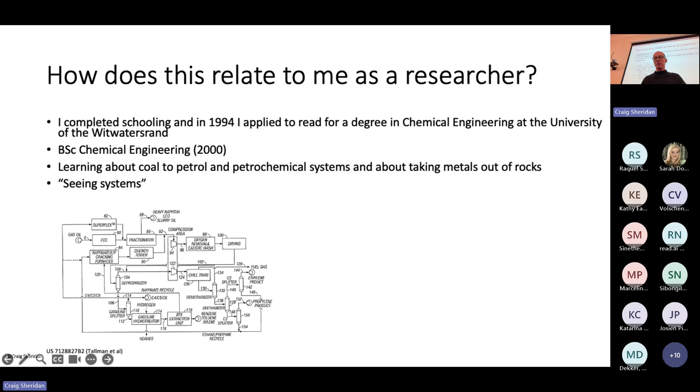The chemical engineer in me, the one that saw systems, observed this and shelved this information for later use. Specifically, I started to observe the link between environmental degradation and poverty. And I was starting to see some of the parts of much bigger systems at play. I was then very lucky.

I was given an opportunity to become a lecturer at Wits University in 2010, and I used this opportunity to conduct research. Around this time, there was a presentation given at Wits on publishing, and in fact, it was someone from Science or Nature who came to our university, and really, the gist of their presentation was that if you want your research to have impact, you need to be researching something that impacts society.

I've always had a very strong interest in water, and continuing to research water made sense since my PhD was on remediating effluent. I previously observed that wetlands are able to purify effluents, and I was intrigued by this. They always looked beautiful and had the secret hidden benefit of purifying wastewater.

So I set out, and these are big parentheses, naively as it turns out, to try to understand how this happens. And it turns out I'm still trying to understand some of these mechanisms. But water was an obvious domain for me to conduct this research. At the time, as a chemical engineer, there were also two other very obvious themes for me to consider. The one was acid mine drainage, which I spoke about last week, and the other one was constructed wetlands to treat different elements. So I'm going to separate these out for now.

I conducted initial research on constructed wetlands for treating winery effluent. The study had two thrusts. One was trying to understand how the fluid flowed in the constructed wetlands, and the second was trying to model the rate of degradation of the components of the effluent. Turns out that they work quite well for certain types of effluents.

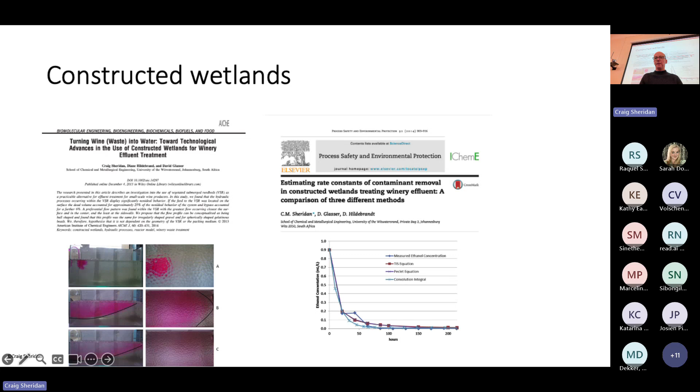This led to a research program to determine which effluents we could treat, and the mechanisms of this treatment. We treated mine effluents, and we successfully removed chromium. We also observed that wetlands became blocked, so we started to try to understand why they were blocking and how to overcome this. Obviously, if your treatment system is blocked, it doesn't work.

During this period, I was also fortunate enough to do the conceptual design of the greywater treatment constructed wetland at the Vodacom Innovation Centre north of Johannesburg. Following on from this design, I collaborated with Andrew Thatcher, who's a professor in the Department of Psychology, to assess how people engaged with the constructed wetland. The findings were very interesting, certainly to me.

The technical manager had a very different understanding of how the system worked to the cleaner, and both of them had a different understanding to mine as the designer. Most importantly, of everyone who used the system, the cleaner, who was a very nice lady, had the greatest potential to destroy it. She used bleach to clean the basins, and if you throw bleach into these living systems, they tend to die.

So my realization at this point was that as designers and engineers, it's our responsibility, and I use that word very carefully, it's our responsibility to engage with people. We must do more than just design, build, and sit back.

We conducted further research into the hydraulics of these systems, and I'm particularly showing this page, which is from a paper with lots of really horrible equations, to show that we went very deeply from a mathematical modeling perspective to understand how the fluid flows within these constructed wetlands.

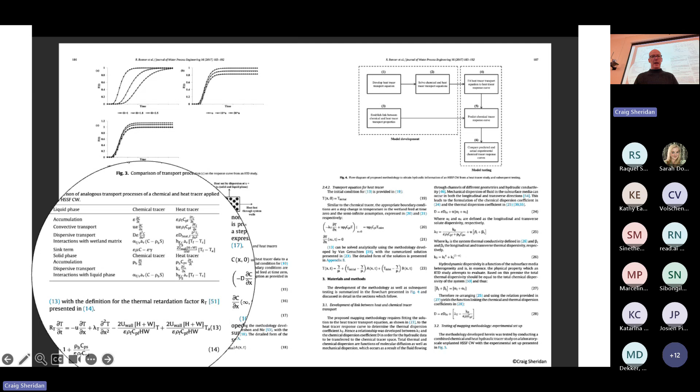And again, collaboration was key. We had mathematicians and environmental engineers for collaborators and input, but we also relied on fundamental chemical engineering theory. And based on this, we decided to expand this research into the physical world. So our statement at this point was, perhaps these could work in an unplanned urban context.

And I want to take a moment here to define what is meant by unplanned urban. In South Africa, we call these types of settlements informal settlements. I contest this definition on the basis that these settlements are not informal. Where we were doing this research, some of the homes have been in existence for more than 20 years. Many are now brick and plaster structures. This is formal. What these settlements are is unplanned, which is why we're calling them unplanned.

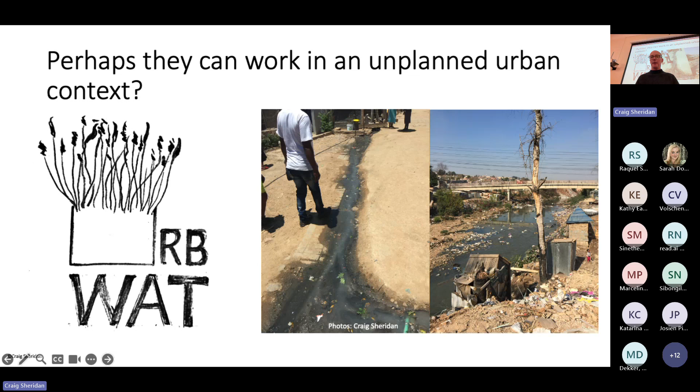I believe this affords the residents who live in these settlements a dignity which is denied if we call them informal. In exactly the same way, I try not to use the word community, as in community engagement, because this differentiates us from them on the basis of the community where you hail from. And I find this obstructs meaningful engagement, certainly at least in my head when I'm trying to work with the local people. Therefore, I try to call the community the local people, but this is a much harder habit to break than calling them informal settlements.

So we were very lucky. We applied for EU funding from the Water JPI, which is now called the Water for All. And we were granted funding from these three different organizations, which is the BMBF, FORMAS, and Water Research Commission. And we designed this project called URBWAT, which was accessible greywater solutions for urban informal, you see, we haven't changed our nomenclature yet, urban informal townships in South Africa.

So when you have a look at what these places are, what we find is this intersection of multiple interconnected water issues. I'm going to put my laser pointer on. We have sewage, which comes out of blocked sewers. There's a reason many of these sewers are blocked. It's a socioeconomic reason. And this often comes from a formal or a planned suburb adjacent to your site.

We have above ground, we call them portaloos. They're often used in building construction sites. These belong to the local inhabitants, and that would typically serve 4 people, 4 families, 4 homes. But you also have this issue with stormwater because there is no planning. So stormwater backs up and it builds around your site.

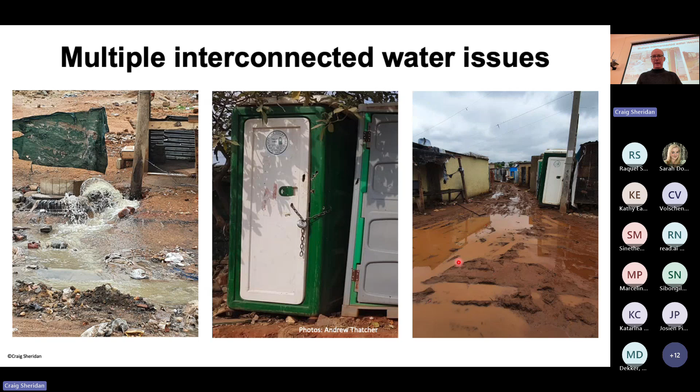In addition, we worked at this location, which is called Silvertown. This is in a suburb called Alexandra, which is just north of Johannesburg and just east of Sandton. Sandton is the economic hub of Africa, for those of you who don't know. This suburb here is called Silvertown, and the reason it's called Silvertown is it was initially built with silver corrugated iron shacks. And this is the Jukskei River, which is the primary drainage river for Johannesburg. It flows north into the Indian Ocean.

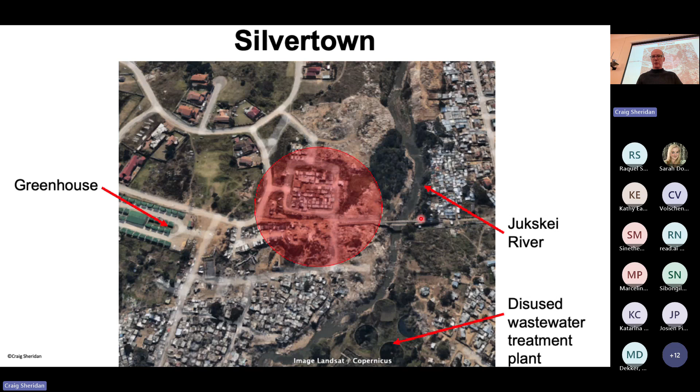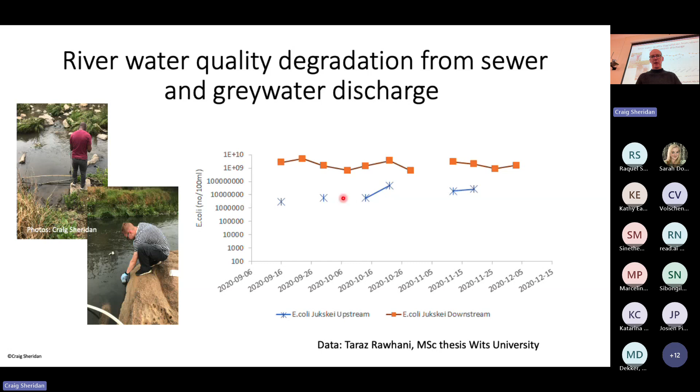So, and this is a river. So we have massive changes. The reason this data is discontinuous is that actually we had a number of instances where there would be security risks, so we were not able to access the upstream sample, and therefore we would not take that. But it doesn't matter whether it's continuous or not. What we can see is a very clear indication that the community or the settlement has an enormous impact.

So part of our project, we had a go, no-go marker, and the first one was, could we build it? Could we have access to the site? Would we be able to get people to buy in? So we did what we call co-design, and we brought in the local inhabitants, and there's a workshop area like a community hall, and we had workshops, and we tried to understand what they would want from an urban drainage or an urban wastewater treatment system.

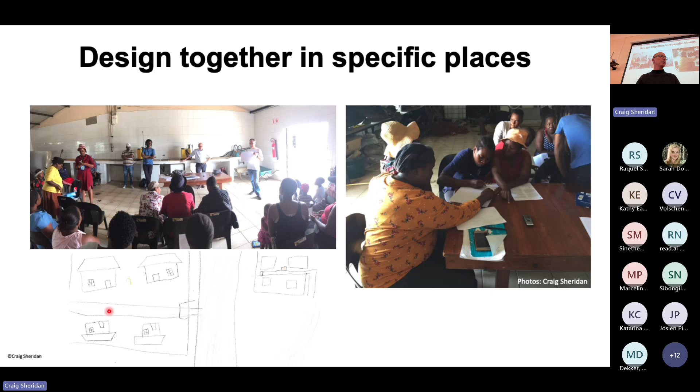And it's very clear what they want is what everyone else has: they want sewers. They want the water away from them as quickly as you can possibly get it. We hadn't proposed to do that, therefore we were not able to build this. So we worked with these ladies, and they were all ladies. I must also emphasize this. We worked with these ladies to say, well, what can we provide instead? We were proposing these wetlands, and we said we would do that.

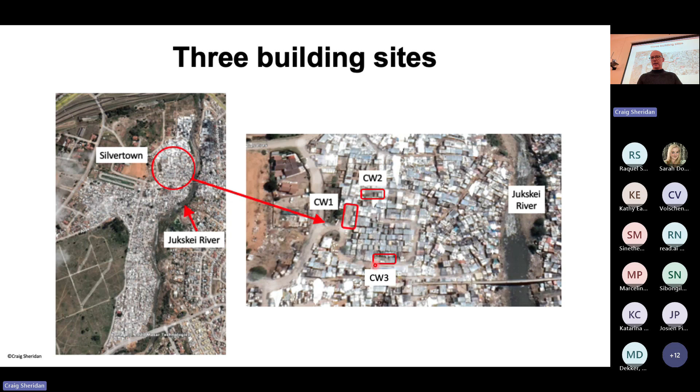So we chose 3 separate sites. We had phase 1 and 2, which were CW1 and CW2, and then we came back later and we built CW3, constructed wetland 3. So we had phase 1 construction. This is wetland 1 and wetland 2. And I want you to notice the design, how we have this drainage area. We don't want pumps because they either block or they get stolen or they get broken. So you have a little bit of gravity flow.

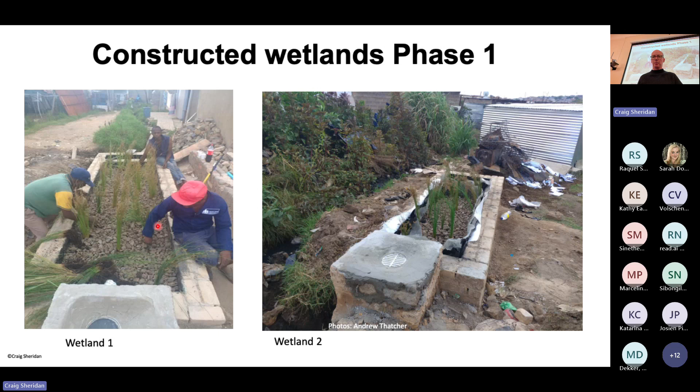And we have local construction materials. These are reclaimed bricks. And we have some plastic liners, and we have a gravel bed filled with wetland plants. So the only thing that came from external to our site was the wetland plants. We bought them from a commercial nursery north of Johannesburg. And we were quite happy with this, except 6 months later, we saw they were dead, entirely dead. So we said, okay, something is happening. What's going on? Maybe we need some more information. And the reason there was a 6 months hiatus is that this is the first COVID lockdown.

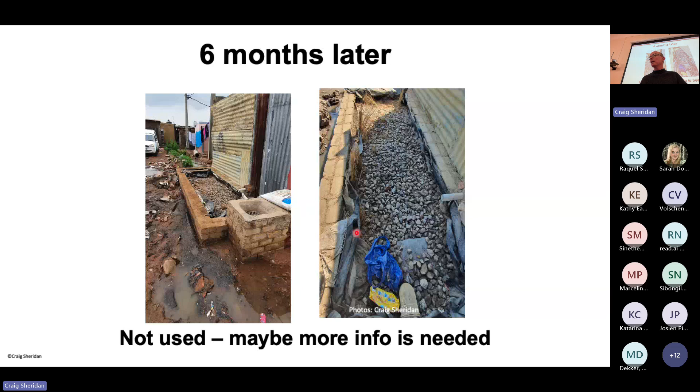So, excuse me, the first indicator that we had a problem was that our plants had died totally. They were totally dead. And we hypothesized that this was because these were nursery plants bought in a nursery supplying rich people to the north of the city. There was absolutely no acclimation available. We said, right, what we would do is let's try and get local plants.

So we walked down to the Jukskei River. I think it was great. There were 2 professors and a local person, and we had shovels and forks, and we dug up these plants out of the river basin. They were exactly the same species, but they've acclimated to this very, very high pollution load. So we figured they probably wouldn't die straight away. We then also realized that probably people didn't know how to use our wetland.

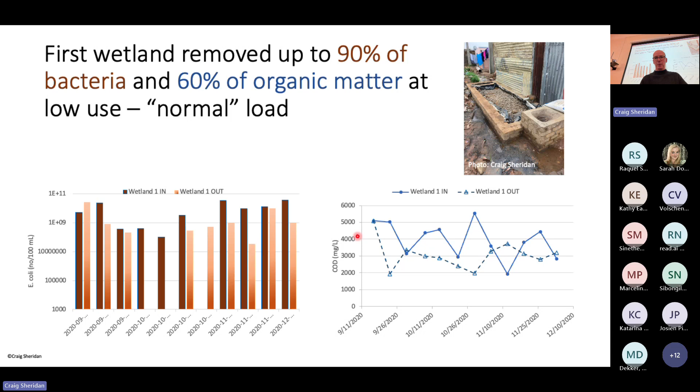So this was great. We knew our systems were working, and we said, okay, let's now rejig them and make them right. And these are our engineering designs for the third wetland, which we then built, but we extended wetland 2 to include a second portion. But now what's changed is, in wetland 1 as well, we had this long drainage area beyond it. But what you can see is this tap area we entirely redesigned.

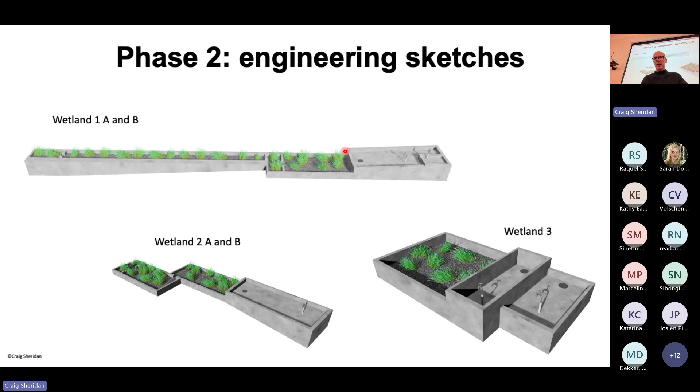And this was done on the basis of an ergonomic study that we collaborated on with human movement scientists at Rhodes University in Grahamstown. And the reason for this was what they typically do at these universities, or in these...

Sorry, there's an ambulance going past, I can't hear myself. Or police, it's potentially anything. I think that's fine.

So what human movement science people do is they typically work with sports people or with occupational health and safety people to say, how can you either do your sport better and be stronger and fitter, or if you're in an office, how do you avoid injuries? And so they're often looking at the posture of people.

And that's exactly what we then did. We looked at the postures of those ladies, which you can't see me doing, but bent over to do their washing. So that's not a very comfortable position to hold for a long period of time. And we said, well, how can we change that? And that's why we have these raised areas now.

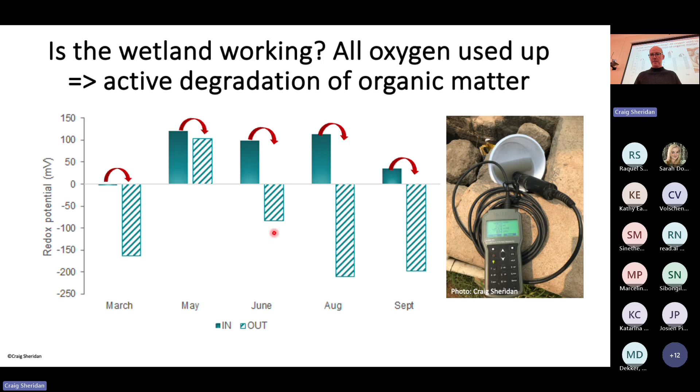We could see that we had all our oxygen used up, which meant we had active degradation of organic matter. And we also had pH neutralization, which was great. But what we weren't able to see was coliform bacteria removal. And this is very difficult now because what we think was happening is that our systems were overwhelmed. In the mornings, we saw huge numbers of people using our systems.

And we hypothesized that the pulses of E. coli were still traveling through the systems when we started to do our samples. So we have no real sense of it. The uncertainty is based on a lack of representative sampling. So what were our key lessons from this site?

So the first key lesson was that we were victims of our own success. By making systems easy to use, they can rapidly be overwhelmed and overloaded. So that's important from an engineering or science perspective. If you're going to design a system with a certain number of people in mind, if it's too useful, you'd better be thinking about how you can roll that system out across multiple locations, because otherwise your system will break. The second thing was that low maintenance systems are not no maintenance systems.

And maintenance requires energy from people and very clear lines of responsibility. So this is around management. So without management, it's very difficult to get these things to work on a longer term basis.

Third lesson was that it's very difficult to work in rapidly changing contexts, increase in urban density, kids poking around in our system. This made it very difficult to do the science. You just put your probe down and you turn around and the kid's holding up your probe, and you're like, oh, okay, come with me, rather have a look at what we're doing than playing with it.

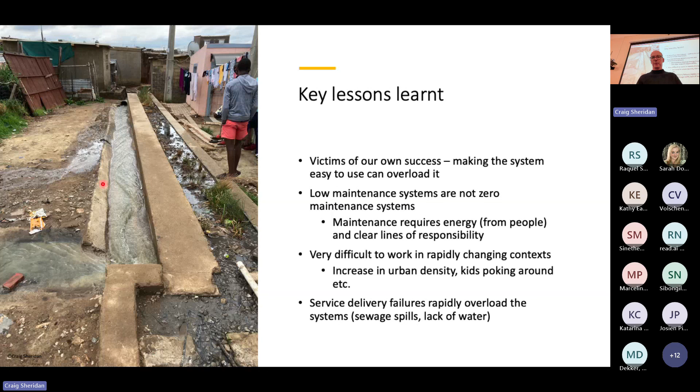So we had other challenges in our society. One of the big ones is acid mine drainage. It's a result of mining activities in sulfide-rich ore bodies. For those who don't know what pyrite is, it's called fool's gold. And I guess the question can be asked is, who's the fool? This results in the generation of acid solutions, which can be very, very difficult to manage.

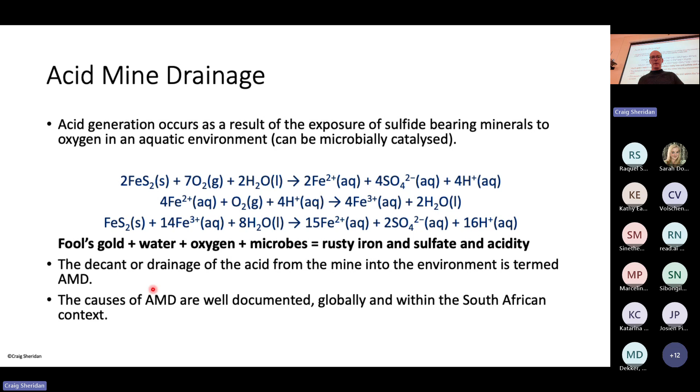So a little bit of technical work, really don't stress about the chemistry, but what you get is you get fool's gold, you add water, you add oxygen, and you add microbes. This is often bacterially mediated. And what you end up with is rusty iron, sulfate, and acidity. And this acidity is really the problem because it does all sorts of other things. The decant or drainage of this acid from the mine into the environment is termed acid mine or acid rock drainage. And the causes are well documented globally as well as within the South African context.

We can solve the problem using physical, chemical, biological processes, and can utilize plants or microbes if you go biologically to effect some kind of remediation. And typically what we do is we do this backward shuttle of the chemistry that you saw in the first one, where you take sulfate and a microbe and you give them some kind of a food source, some kind of a carbohydrate, and the Dutch are particularly good at this. They use ethanol, but you can use almost any organic substrate.

And if you take away oxygen, these microbes use basically this oxygen in the sulfate, and they release carbonate, which is quite good because it's a little bit of alkalinity, it raises the pH, and they make H2S. H2S is an environmental pollutant. It's not a great one, but in my context, I'm thinking, well, you know, I've one really bad one and one less really bad one, but the H2S is poisonous.

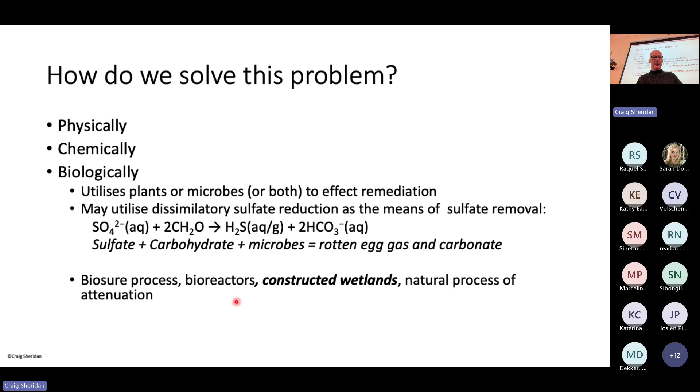But what you could also do is you can precipitate it out on iron. So there are ways of managing this rotten egg gas. But this is typically what you'll find in any marshy system in the world. When you start smelling marsh gas and rotten eggs, it's this anaerobic activity. So this is one of the ways of solving this. We tested it. We used charcoal or slag-based constructed wetlands. We had a look what would happen if we just left the grass in it, and it turns out it works.

And then what we did was we said, well, maybe we can flip this coin. Maybe the acid isn't a problem. Maybe it's a resource. So our question became, what is sulfuric acid used for? And it turns out that it can be used to pre-treat cellulose for enzymatic digestion. So as a point of explanation, our current biofuels are primarily made from food or starch or sugar products.

We haven't managed to make biofuels from cellulose, which is the cell walls of plants, except by burning the biomass. These cellulosic biomasses are called second generation biofuels, and they're typically the holy grail for the biofuel industry because there's vastly more cellulose available than these sugars that you get from the crops themselves. And this is a particularly important point in a country where food security is not ensured.

You don't want to be diverting wheat to ethanol to remediate your sulfate-rich waters. And the reason we want biofuels is because batteries are heavy and they have a low energy density. So when you're looking at things like electric vehicles, the batteries are big, bulky things, and they don't get you very far. And that's why internal combustion engines are still around, even though we know that we shouldn't be using them. It's because the energy density of a fuel is much higher than on a battery. So whilst they're not going to be the future energy solution, they will certainly be part of the energy mix.

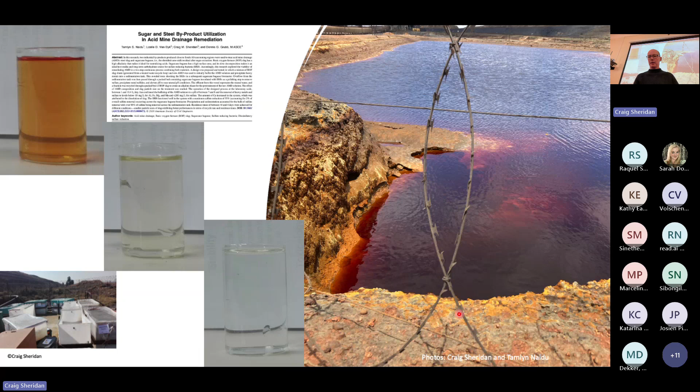But what's more interesting, in fact, for me than this, was that while we were doing this project, we discovered that the AMD has a stack of critical minerals which leaches out of the rocks, those same rocks which generate the acid, that we can extract, or at least try to. So the problems are not necessarily always problems. Sometimes they are opportunities. We just have to change our perspectives. And I've spoken about this project last week, which we got a lot of follow-on funding from the Danish International Development Agency, and we're still collaborating with the University of Copenhagen.

So I want to talk about changing perspectives. And I think this is where it's important to discuss what we're trying to do. This is walking into the wild, getting out of the comfort of our home disciplines. So I guess the question is, what are our water problems? When I say our, I'm specifically speaking about South Africa. And we've got many. We have poorly maintained and failing sewage treatment plants and sewerage infrastructure. This leads to untreated sewage entering our river systems. We have concomitant health problems such as cholera. Last year, we lost 36 people to cholera, which should not happen in the 21st century.

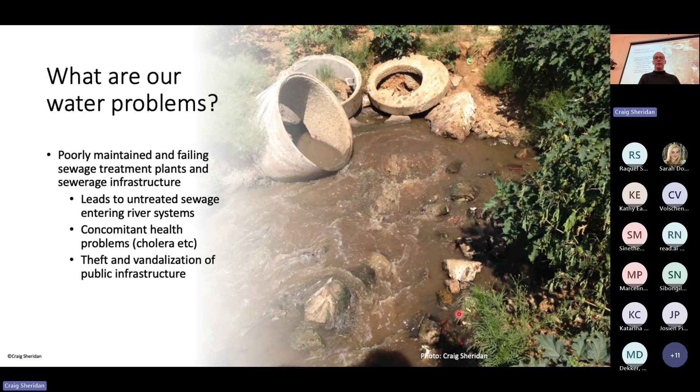And we also have a lot of theft and vandalization of public infrastructure. In addition to this, we have poorly maintained and failing drinking water systems. If anyone's reading the news, Johannesburg is under extreme stress at the moment. Many places in the city don't have water as we speak. And that's really not around supply challenges, it's around reticulation and poorly maintained infrastructure. But when we do this, what happens is that it becomes increasingly difficult to treat the water that's impacted by sewage to drinking quality. We have this aging infrastructure. Leaks are an enormous problem. We currently have 46% non-revenue water in Johannesburg. That's lost to leakage and theft.

And then just because we don't have enough problems, we also have industrial, urban, and agricultural contamination, which is all lumped in with acid mine drainage. And this massive impact of mine water to our resources has a very long-term cost associated with it. And what's probably more important, and we're not identifying this as important, is there are now new things entering into our system which we know very little about. Firstly, because of the analytical difficulty of finding these things. And secondly, because there's a significant amount of global uncertainty. And these are things like microplastics, PFAS, pharmaceuticals. And this is going to be increasingly important for us to know about as we try and solve our problems, because we may end up poisoning ourselves with these things if we don't have a grip on them.

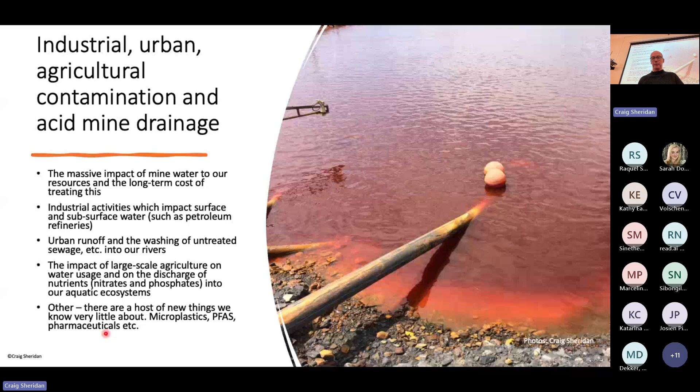But solving the water problems requires the co-solving of other problems. South Africa and many other places in the world has many very serious challenges to its provision of water. If you ask people what they are, they can include population growth. Currently, we're expanding by about 1 million people a year, so we're currently approaching 64 million people. They include climate change, poor governance, corruption, poverty, weak education systems, rolling electrical blackouts, lack of trust. But none of these are water problems. These are all socio-economic problems.

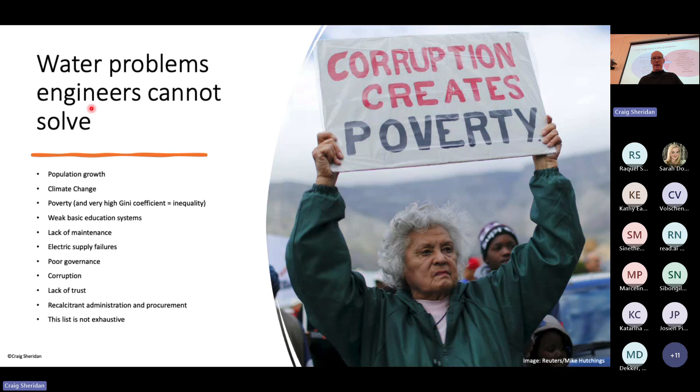And the problem with the water sector is causality and the engineering approach towards the application of the solutions. These are the problems that are exceptionally hard to fix. And in fact, I think solving these problems is substantially harder than landing the rocket back on the launch pad. So what we are trying to do is solve the symptoms, but not the causes.

The red and blue overlap on this graph, this diagram, it's a wonderful engineering approach, is the sweet spot where engineers are able to get it right. Engineers and scientists solve very clearly defined problems on the basis of a clear set of assumptions. For example, a town of 100,000 people needs the provision of potable water and for the sewage to be treated.

The designers will assume that the population will grow or not, that the cost will be shared somehow amongst the population, and they will then design according to a set of rules for how much water is required to support this population. But there are also some implicit assumptions that are not necessarily stated outright until fairly recently, like the need for electricity. What engineers do not plan for is a change in government that may deprioritize the maintenance budgets and thereby extend the designs beyond their intended lifespans.

And that's not just a South African problem. If you want to, you can read up about the schools in Great Britain that are falling down because the concrete has reached the end of its lifespan.

Engineers also do not necessarily design for a massively increased population to be plugged into the system without proper consideration of extension or upgrade. The causality of extremely dynamic social pressures are not well suited to being incorporated into the design space. Normally, the designer will include a buffer capacity, and that's normally based on professional judgment, but it's not always sufficient. But it is also my belief that our sector is trapped. The engineers and scientists are trapped trying to solve problems they have no control over.

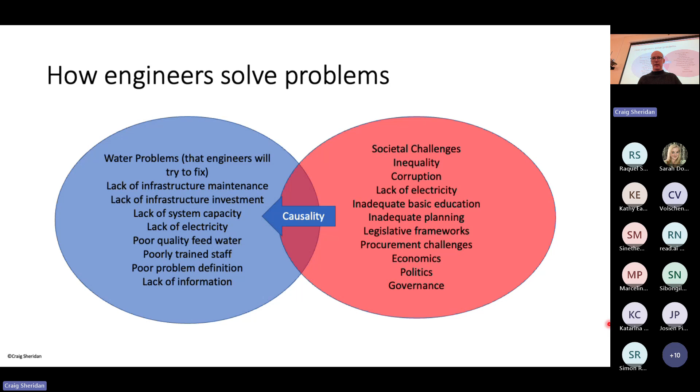But I also think in many ways the present has not changed from the past. And I'm going to quote from Lao Tzu, from the Tao Te Ching, and I'm probably going to do this twice. So the wise soul governing people would empty their minds and fill their bellies, weaken their wishes, strengthen their bones, keep people unknowing, unwanting, keep the ones who do know from doing anything. When you do not doing, nothing is out of order.

I'll say it again. So the wise soul governing people would empty their minds, fill their bellies, weaken their wishes, strengthening their bones, keep people unknowing, unwanting, keep the ones who do know from doing anything. When you do not doing, nothing is out of order. And I think that's the political lesson we see all around us, because the wise souls are doing that for us.

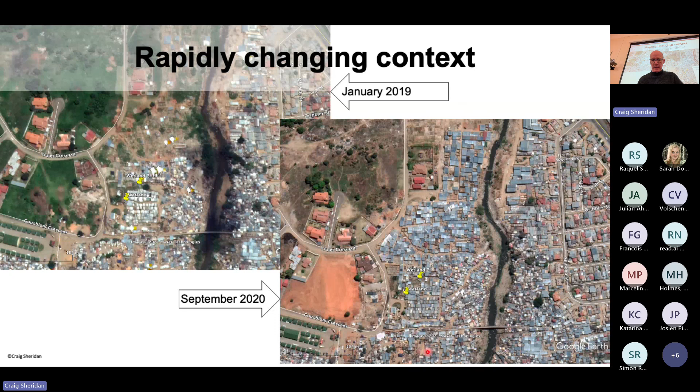And then in the wetlands that I showed you, where we had those taps, maybe I can see one of the community taps there. This standpipe was a municipal standpipe that was given to the community. But these people are very enterprising. So what they'll do is they'll cut a pipe and develop their own reticulation networks into the community, all informal. And this is partly why we have such high non-revenue water. So that tap then services a whole area. So people then get washing machines and they put them in their shacks.

And an example of that is on this graph, you can see that's this shack here. They bought a washing machine. So he just popped his washing machine outfalls directly into our wetland because it was there. So it's all entirely informal. There's absolutely no structure. There's no planning. There's nothing. And as people accumulate possessions and also small amounts of money, they then start to formalize this. On the left of him, you can see it's a brick wall now. They will discard their tin and build bricks, and then the tin goes onto the roof, or it gets used somewhere else.

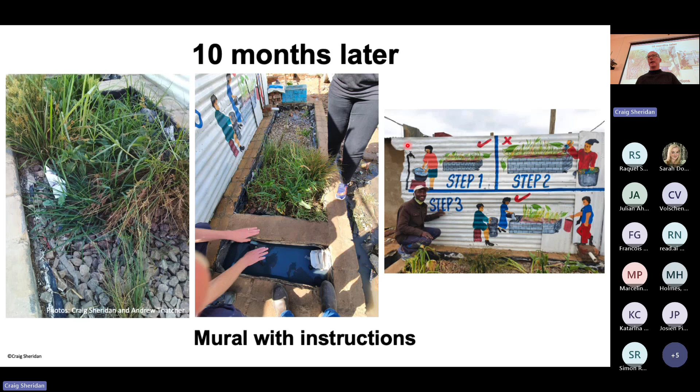Cool. I'm going to just, yeah.

Just another follow-on question. You did mention that everyone that you were engaged with in the community, or at least for the community meetings, were women. And I wondered about that. Was it A, they were most commonly there, B, they were the ones using the water, so they were the best to engage with, and they were going to be the ones who were adopting, as you can see here in the picture, using it for washing? Or was there other reasons why it was only women?

No, it was women because they were more interested. I think that's it. The men were typically sitting outside their shacks, throwing dice and drinking beer. So, I mean, it sounds like a 21st century cliche, but it's really why I believe developing women leads to better outcomes for societies, because they tend to be more engaged and more interested, especially in these types of contexts.

Cool. Thanks. Pleasure. I hope I answered your question, Julian. Yeah, you did. I think you did.